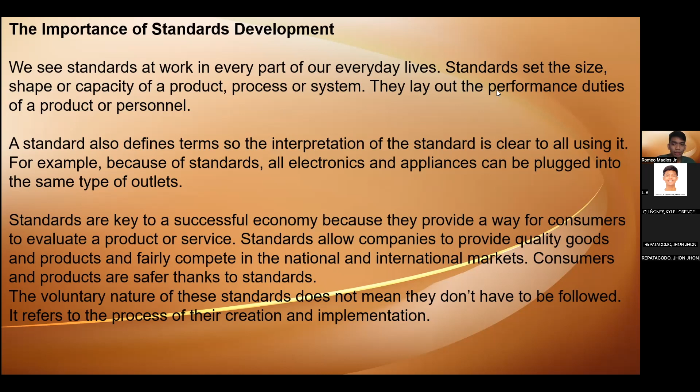Next slide, please. So American National Standards. This section solicits public comments on proposed draft new American National Standards, including the national adoption of ISO and IEC standards as American National Standards, and proposals to revise, reaffirm, or withdraw approval of existing American National Standards.

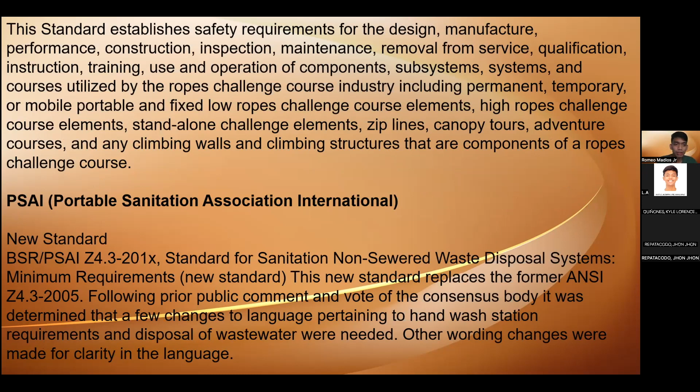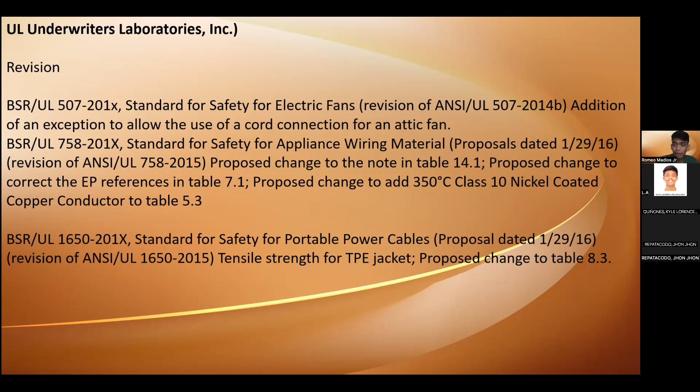Next slide. Underwriters Laboratories, Inc. - it is all allowed the use of cord connections for, dito sa nang-revise nila is all about wiring materials. Naka-focus sila sa isang cord connections for an attic fan. May mga standard na dapat gamitin dyan, kapag especially sa mga attic fan, may ginawa silang mga proper sizes or proper voltages na dapat. Madidiscuss yan sa next sa grupo ko for more information regarding dyan. Nakalagay dyan yung mga proposed change, yung mga temperature ng isang nickel coated copper. Nakalagay sa isang table dyan yung mga standard.

Next is Association for the Advancement of Medical Instrumentation. Dito naman, this is part of ISO 10993, nag-specifies requirements and gives guidance on procedures to be followed in the evaluation of the potential for medical device materials to cause adverse systemic reaction. Dito, nakafocus naman sila sa isang medical device materials na dapat may mga proper procedure dyan, yung mga guidance na dapat gawin kasi alam naman natin na sobrang sensitive ang mga medical device na dapat gagamitin. Dapat may mga proper guidance and procedure kung gagawin natin ito. Nakapaloob sa article na yun yung mga dapat gawin.

Next is ASABE or American Society of Agricultural and Biological Engineers. Ito is a new national adoption. It specified the type of information on safe working practices to be provided by manufacturers. Dito, nakapaloob sa isang article na to yung mga - ito yung specify the type of information on safe working.

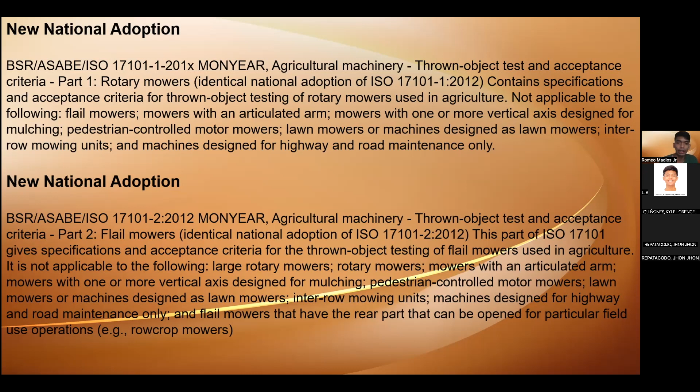Next is similar to that - verification. This is the safety standard for large row crop flail mowers, the new standard safety requirements and verification for design and construction of row-crop flail mowers with a cutting width larger than 3 meters, used exclusively for agricultural row crop applications which may have a rear part that can be opened for particular field operations. This method describes the elimination or reduction of hazards arising from intended use.

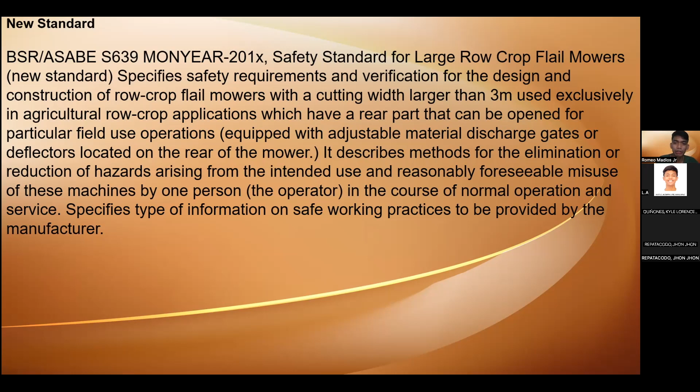Next is ASHRAE, the American Society of Heating, Refrigerating, and Air Conditioning Engineers. This is an addenda meant to eliminate scope overlap between 90.1 and 90.4. This addendum will not be published until 90.4 has been approved by the ASHRAE Board of Directors and there are no pending appeals. So this addenda is still pending.

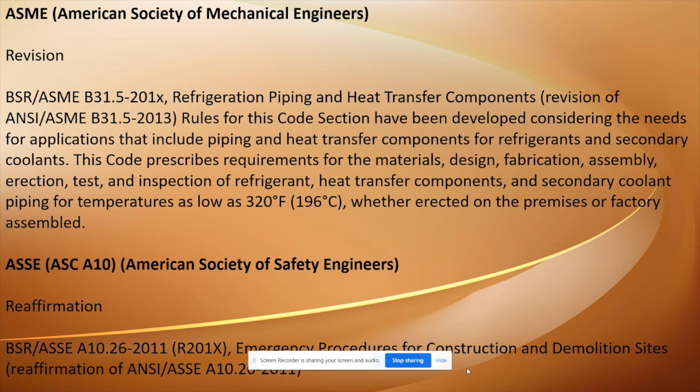This standard applies to those emergency procedures involving fire, collapse, hazardous spills, and other emergencies that could endanger workers, requiring emergency rescue of injured or ill workers, or of uninjured workers unable to rescue themselves. Next is on-site provisions of first aid and emergency medical care. Four is evacuation and transportation of injured or ill workers to appropriate emergency medical facilities. Five is the pre-planning and coordination of emergency plans with emergency medical facilities. Six is training on emergency procedures and plans for workers and other groups. This regulation is all about those emergency procedures.

So yung mga pre-planning during evacuation, before and after evacuation. Kapag may mga injured person, mga ill workers o yung mga injured workers, nakapaloob dito yung mga proper o mga standard o guideline na dapat gawin, mga dapat gawin, mga basic step.

Next is ASSE, American Society of Safety Engineers. This is all about safety requirements for climbing ladder fall arrest system, a new standard.

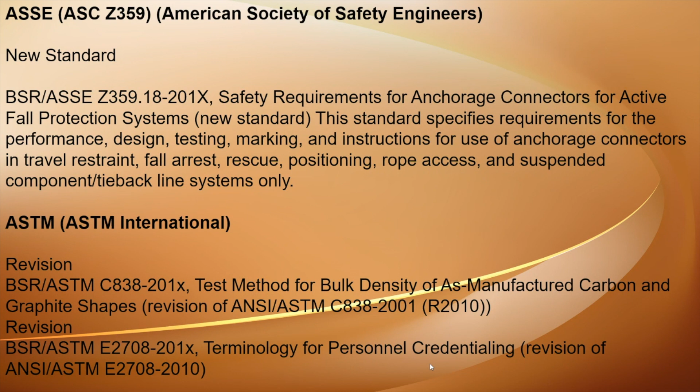Next is ECIA or Electronic Components Industry Association. New standard specification for small form factor, 88.9 mm, 3.5 inches drive new standard. This standard defines the dimensions and interconnections of the 88.9 millimeter or 3.5 inch small form factor disk drive. The purpose of this standard is to define the external characteristics of small form factor disk drives so that products from different vendors may be used in the same mounting configuration. The standard provides specifications on external dimensions, connector placement, mounting holes, and interface pinouts to assist manufacturers in the system integration of small form factor disk drives.

So this new standard, ginawa nila ito, ang purpose nito is para ma-define yung external characteristic ng disk drive, yung small form nito. So yun, nakapaloob dyan. Next is reaffirmation.

It is all about cable flexing test procedure for electrical connectors. These standards establish a method to determine the effectiveness of round jacketed cable relief shields or interface to withstand strain under repeated alternating cable flexing stress as experienced in use with molded or mechanical backshell. So cable strain relief designs commonly used with electrical connectors.

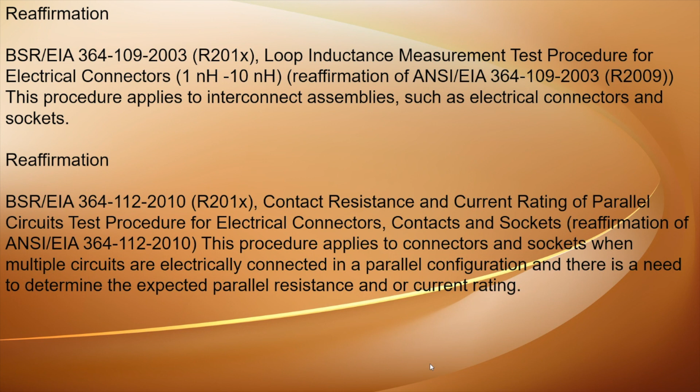Next is revision, environmental test methodology for verifying the current rating of freestanding power contacts for electrical connectors and sockets. This standard describes the recommended test sequences for verifying the specified current rating of freestanding contacts or electrical connectors and sockets used in power applications. This sequence may be used to qualify products with a specified current rating. Dito sa revision na to naka-focus sila sa mga recommended test sequence para sa pag-verify ng current rating of freestanding contacts, yung mga electrical connector or socket use na gamit sa isang power application. Nakapaloob lang 'to sa isang electrical connectors na nagamit sa isang power application, yung mga specified current rating.

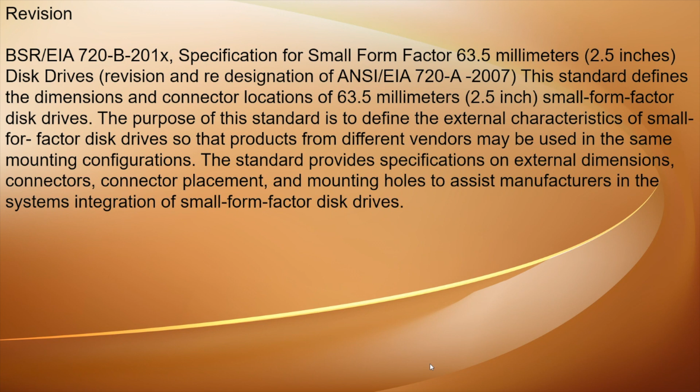Next one. IES, Illuminating Engineering Society of North America.

Lighting for hospitals and healthcare providers, reaffirmation of ANSI. This practice offers guidelines for good lighting in those areas unique to healthcare facilities and is intended for both lighting designers and healthcare professionals. Lighting needs are specific to acute care hospitals, chronic care hospitals, extended care facilities, and related facilities, freestanding ambulatory surgical centers, and emergency centers.

Dito, itong information na to is naka-focus sa good lighting especially sa mga healthcare facilities. Dito yung mga standard na gagamitin para sa mga magandang pailaw, para siyempre healthcare facilities, alam naman natin yan. Healthcare professionals, alam natin 24 hours yung ilaw na ginagamit. So syempre dapat alam natin yung standard na dapat.

Next is NEMA, National Electrical Manufacturers Association. It's all about magnet wire, revision ulit siya, and the redesignations of ANSI again with NEMA.

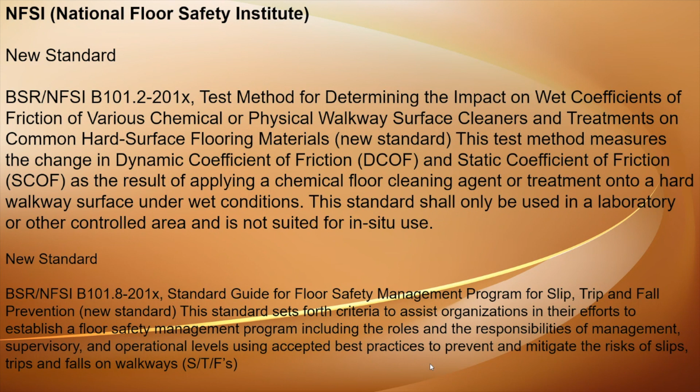So next is NSF, or NSF International. This is also a revised standard, for drinking water treatment units. The purpose of this standard is to establish minimum requirements for materials, design, construction, and performance of drinking water treatment systems that are designed to reduce emerging compounds in public or private water supplies, such as pharmaceuticals, personal care products, and endocrine disrupting compounds. Dito naman sa standard na ito, para makapag-establish ng minimum requirements ng material design ng isang drinking water treatment system na naka-design para ma-reduce yung emerging compounds, especially sa mga public or private water supplies tulad ng mga pharmaceuticals, personal care products, and endocrine disrupting compounds. Alam naman natin na sobrang sensitive ng area na iyan, kaya dapat pati yung tubig ay dapat nating ma-meet yung standard, ma-meet yung mga minimum requirements, especially sa mga design. Kasi once na pumalya na yan, malaking epekto, especially yun nga, may mga sensitive place na dapat, ultimo pati tubig dapat may standard.

Ganun. Next is Underwriters Laboratories Incorporated. Ito, marami itong parts, pero ito yung pinaka-main focus dito is yung Part 5 sa Standard for Safety for Explosive Atmospheres. So Part 5: Equipment Protection by Powder Filling. Proposed date: January 29, 2016.

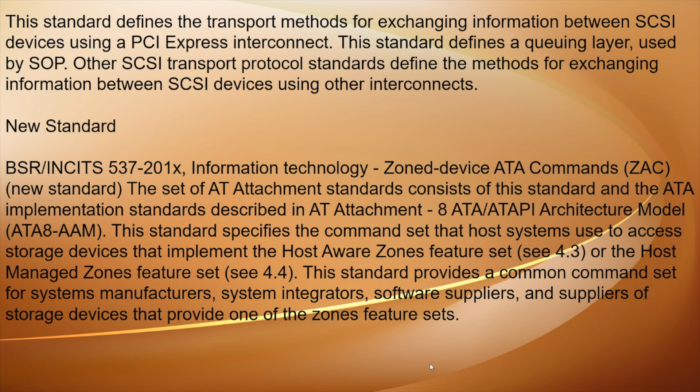Next is Underwriter Laboratories Incorporation. New national adoption, part 1 only covers general requirements. These are identical national adoptions of IEC 60730-1 and revision of ANSI UL 60730-1, 2013 edition adopting the 5th edition of IEC. This article covers part 1, the general requirements, especially the identical national general requirement standards. If you want more information, the next group will discuss more about part 1.

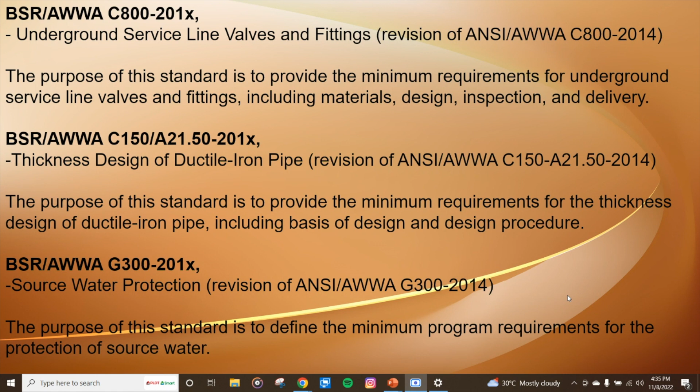Next is BSR or AWWA G430-201X, Security Practices for Operation and Management. The purpose of this standard is to define the minimum requirements for a protective security program for a water, wastewater, or reuse utility that will promote the protection of employee safety, public health, public safety, and public confidence. This standard covers the minimum requirements for a protective security program for a water, wastewater, or reuse utility.

Next is BSR or AWWA G481-201X, Reclaimed Water Program Operation and Management. The purpose of this standard is to define the critical requirements for the effective operation and management of a reclaimed water program. This standard describes the critical requirements for the effective operation and management of a required reclaimed water program. Reclaimed water for the purposes of this standard is treated domestic wastewater that is at all times adequately and reliably treated to the level appropriate for the end user.

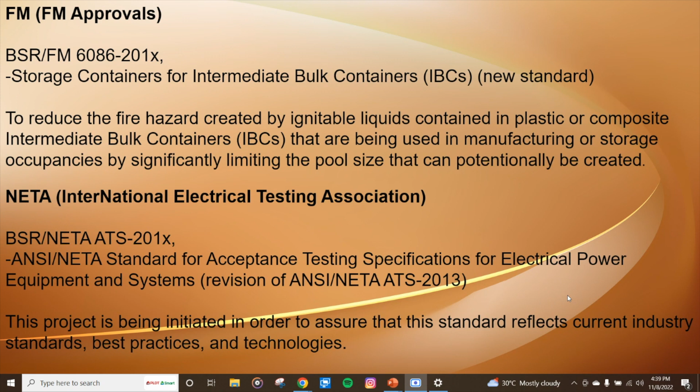American national standards maintained under continuous maintenance. The ANSI essential requirements, due process requirements for American national standards, provide two options for the maintenance of American national standards: periodic maintenance and continuous maintenance. These are the ANSI accredited standards developers that have formally registered standards under the continuous maintenance option.

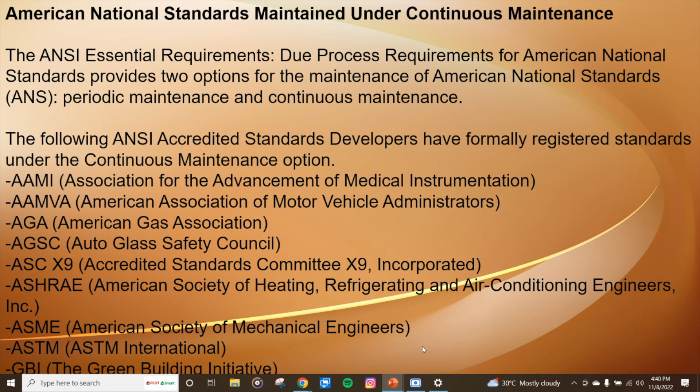AAMI, or Association for the Advancement of Medical Instrumentation. AAMVA, or American Association of Motor Vehicle Administrators. AGA for American Gas Association. AGSC for Auto Glass Safety Council. ASC X9, Accredited Standards Committee X9 Incorporated. ASHRAE, or American Society of Heating, Refrigerating, and Air Conditioning Engineers. ASME, or American Society of Mechanical Engineers. ASTM, or ASTM International. GBI, or the Green Building Initiative.

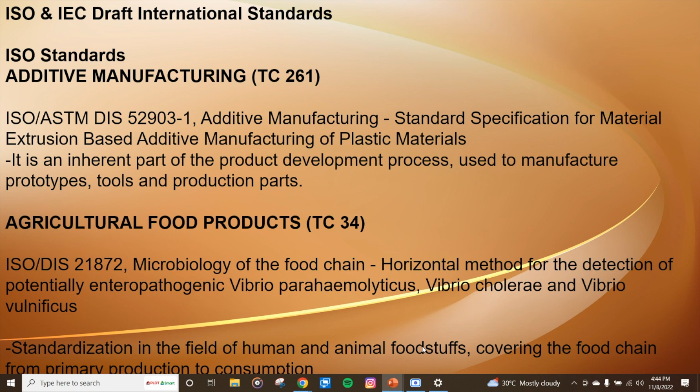Air quality: stationary source emissions, determination of the biogenic fraction in CO2 in stack gas using the balance method. This covers measurement planning procedures for quality assurance or quality control (QA/QC), and methods for the evaluation of results including determination of uncertainty, excluding the establishment of limit values for air pollutants, air quality in clean rooms, and radioactive substances. Next then is aircraft and space vehicles.

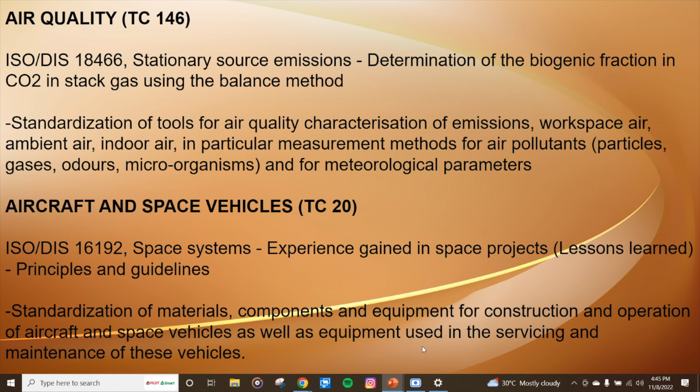Space systems, experience gained in space projects, principles and guidelines. This covers standardization of materials, components, and equipment for construction and operation of aircraft and space vehicles, as well as equipment used in the servicing and maintenance of these vehicles.

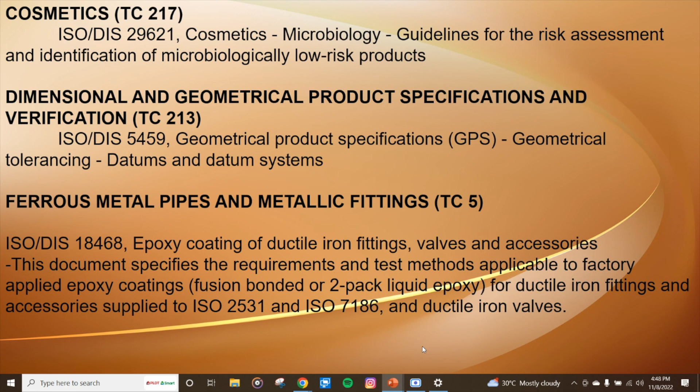Gas cylinders stamp marking. This includes steel and aluminum gas cylinders, composite gas cylinders, acetylene cylinders, liquefied petroleum gas or LPG cylinders, and small cylinders.

Next is gas cylinders, 17E and 25E taper threads for connection of valves to gas cylinders. This specifies the dimensions and tolerances for taper screw threads of nominal diameter 17.4 millimeter used for the connection of valves to gas cylinders.

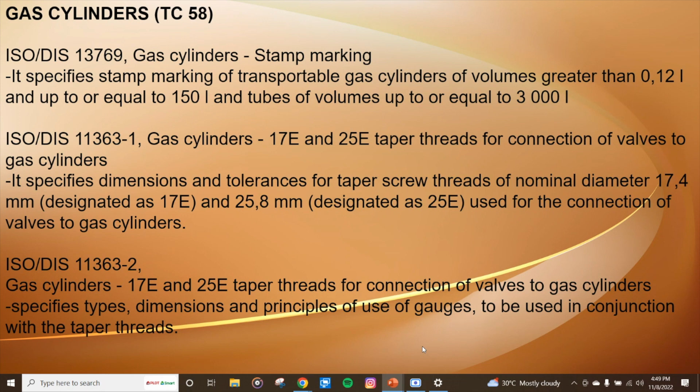Graphic technology. Graphic technology process control for the production of half-tone color separations, proofs, and production prints. This specifies the requirements for systems used to produce hard copy digital proof prints intended to simulate a printing condition defined by a set of characterization data.

Next is industrial trucks. Industrial trucks, lorry-mounted trucks, Part 1, safety requirements and verifications. This deals with all significant hazards, hazardous situations, or hazardous events relevant to machinery when it is used as intended and under conditions of misuse which are reasonably foreseeable by the manufacturer.

Next is internal combustion engines. Methods of test of full flow lubricating oil filters for internal combustion engines. This is limited to steady state conditions and does not address fluctuations in the flow rate. The test procedure determines the contaminant capacity of a filter, its particulate removal characteristics, and differential pressure. This test is intended for application to filter elements with an efficiency of less than 99% at particle size greater than 10 microns.

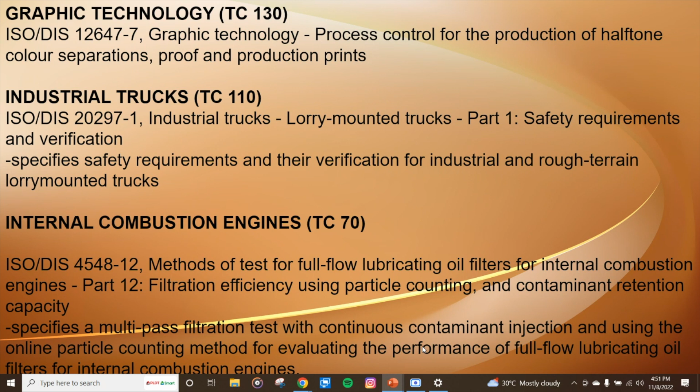Next is machine tools. Environmental evaluation of machine tools, Part 2, methods for measuring energy supplied to machine tools and machine tool components. This provides methods to quantify the energy supplied to components in order to assign their share to generalized machine tool functions.

Next is nickel and nickel alloys. Nickel and nickel alloys forgings. This specifies requirements for nickel and nickel alloy forgings for general purposes.

Next is personal safety, protective clothing and equipment. Protective clothing for firefighters, physiological impact, Part 1, measurement of coupled heat and mass transfer with the sweating torso. This standard's test method characterizes the essential properties of fabric assemblies of a representative garment or clothing assembly for thermophysiological assessment, and is intended to be used to measure and describe the behavior of fabric assemblies of a garment or clothing assembly in response to a simulated series of activities under controlled laboratory conditions.

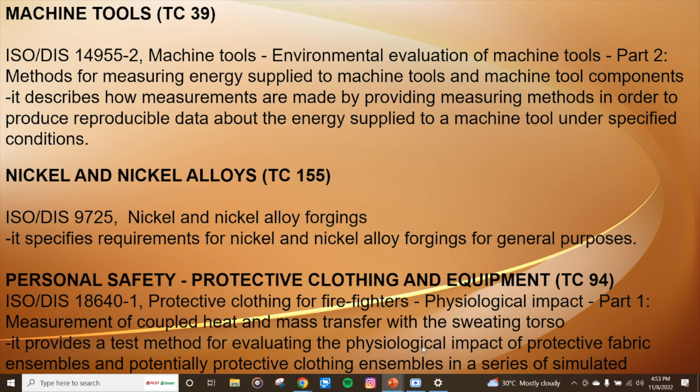Next, protective clothing for firefighters, Part 2. The result of this test can be used as the elements of a risk assessment with respect to thermophysiological load.

Next is plastics. Plastics, vertical flame spread determination for film and sheet. This specifies a test method for measurement of flame spread properties of vertically oriented specimens of plastics in the form of film and sheet, 3 millimeters or less in thickness, subjected to a small igniting flame.

Next is project committee, energy management, activities relating to energy services, guidelines for the assessment and improvement of the service to the users. This provides best practice guidelines for energy service providers in order to continually improve their practices and quality interaction with users.

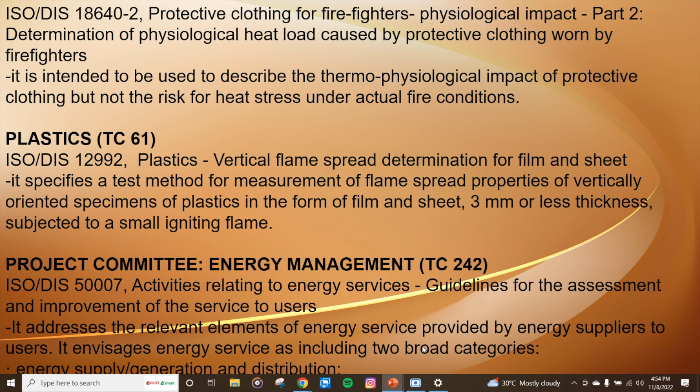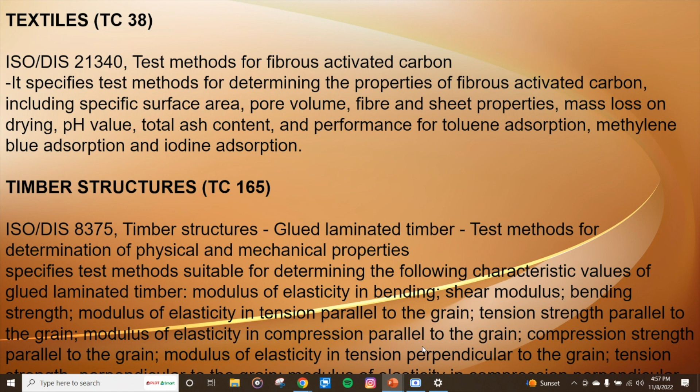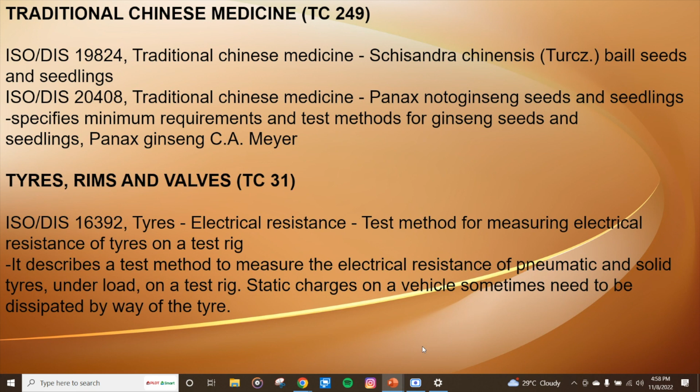Next is tires, rims, and valves. Electrical resistance, test methods for measuring electrical resistance of tire on a test rig. Electrical resistance inversely measures the ability of the tire to dissipate static charge from the vehicle.

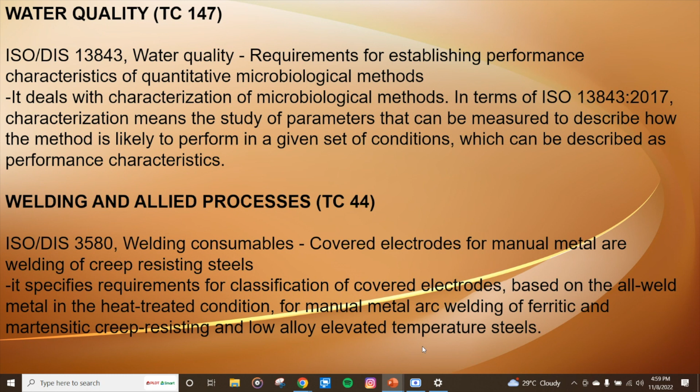Next is welding consumables. This is a combined standard providing for classification utilizing a system based upon nominal composition or utilizing a system based upon alloy type.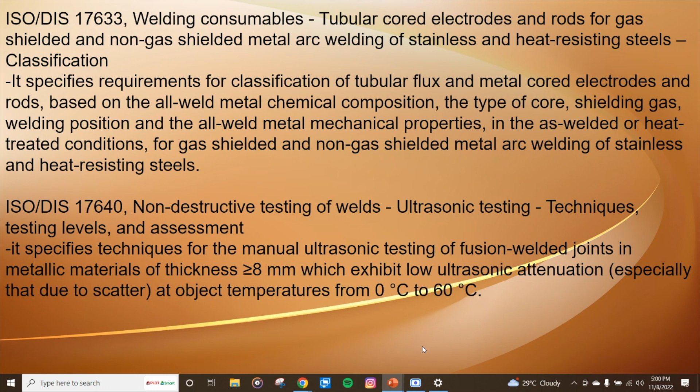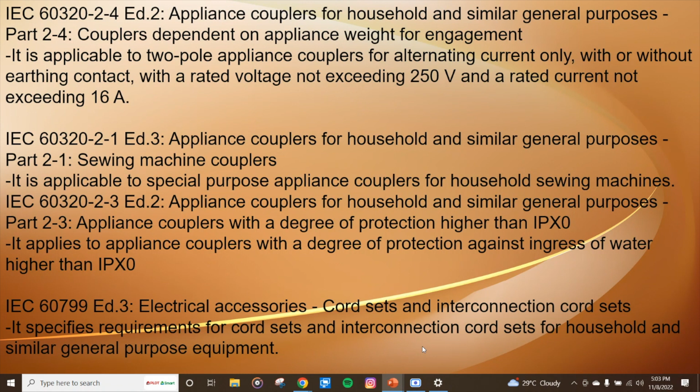Next is quantities and units, Part 5, thermodynamics. This gives names, symbols, and definitions and units for quantities of thermodynamics, where appropriate conversion factors are also given.

Next is electroacoustics, hearing aids, method for measuring electroacoustic performance up to 16 kilohertz. This technical specification describes coupler measurement methods to characterize the electroacoustic performance of hearing aids and insert earphones, primarily in the range of 8 kHz to 16 kHz.

Next is amendment 1, lamp control gear, Part 2-11, particular requirements for miscellaneous electronic circuits used in luminaires. It specifies general safety requirements for miscellaneous electronic circuits used with luminaires for use on AC supplies up to 1000 volts at 50 Hz or 60 Hz and/or DC supplies up to 250 volts.

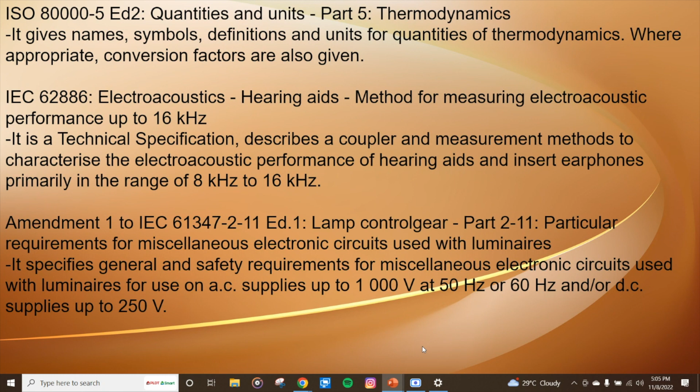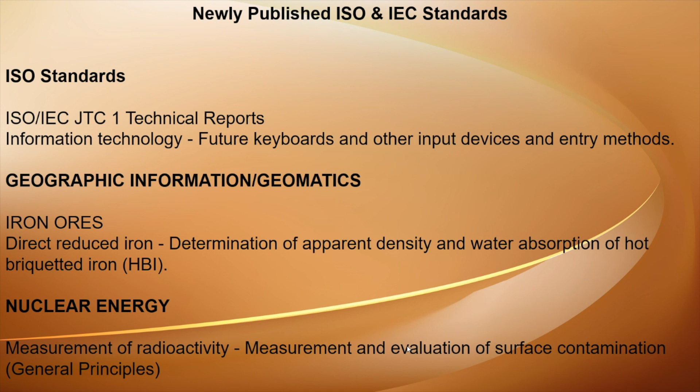Next, measurement of radioactivity. This one is the test method using wipe test samples. So it means like taking samples of the radioactivity.

Next is the apparatus calibration. This next one is like calibrating it.

Next one is paper, board, and pulps. Paper and boards, testing of cores. This means determination of characteristics of conser- concentric rotation.

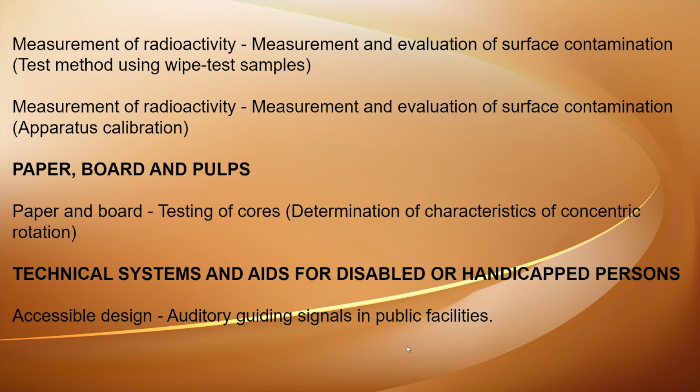Next is technical systems and aids for disabled or handicapped persons. Accessible design means auditory guiding signals in public facilities, like guiding signals placed in public facilities.

Next is transport information and control systems. Under this is electronic fee collection, the application interface definition for autonomous systems, which is charging, like having a fee or charge. Next is the communication and connection to the lower layers.

And next is the application interface definition of autonomous systems, which is context data, pneumatic tubes for automotive vehicles, and technical requirements and test methods.

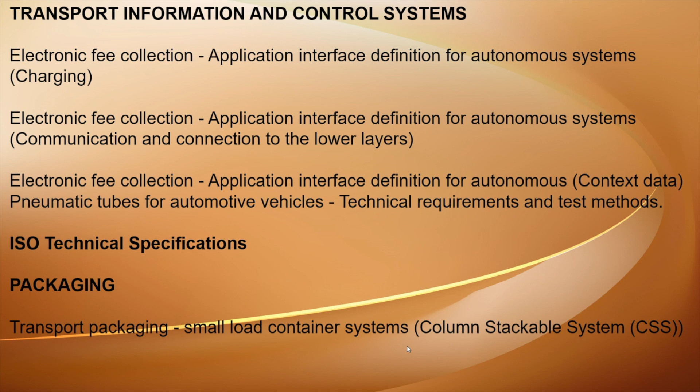Next is ISO technical specification, under which is packaging, transport packaging, small load container system, or the column stackable system. Next, petroleum products and lubricants.

Under that is petroleum products, which is biodiesel: determination of free and total glycerin and mono, di, and triacylglycerols by gas chromatography. Next is determination of the total esters content by gas chromatography.

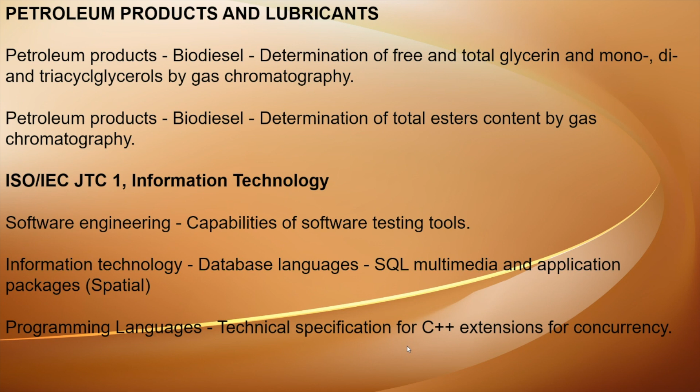Next is ISO, the ISO IEC JTC1 Information Technology, which is under software engineering: the capabilities of software testing tools. Next is information technology, meaning database languages and SQL, multimedia, and application packages, spatial. Next is programming languages, meaning the technical specification of the C++ extension for concurrency.

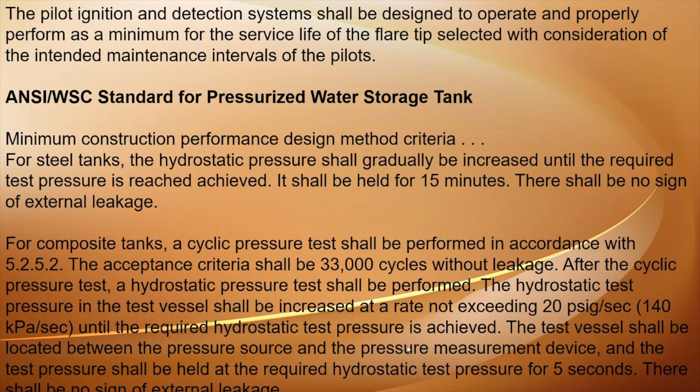For composite tanks, a cyclic pressure test shall be performed in accordance with 5.2.5.2. The acceptance criteria shall be 33,000 cycles without leakage. After the cyclic pressure test, a hydrostatic pressure test shall be performed. The hydrostatic test pressure in the test vessel shall be increased at a rate not exceeding 20 psig per second, until the required hydrostatic test pressure is achieved. The test vessel shall be located between the pressure source and the pressure measurement device, and the test pressure shall be held at the required hydrostatic test pressure for 5 seconds. There shall be no sign of external leakage.

Proposed revision to ANSI PRCA 1.0-3-2014, Ropes Challenge Course Installation, Operation and Training Standards. An error has been noted in the June 10, 2011 public review changes. The purpose of this proposal is to correct the public review error to reflect the standards committee vote on the standard clause. This ANSI public review is for review and comment upon the proposal listed herein only. Note to reviewers: this proposal makes a change to the current standard.

The proposed revision is indicated in legislative format. Strike-through indicates the deletion of a word, phrase, or material. Underline indicates insertion of new wording, phrase, or material. Only the affected portion of the existing ANS is shown herein. Any non-legislative format material is provided for context only and is not open for comment.

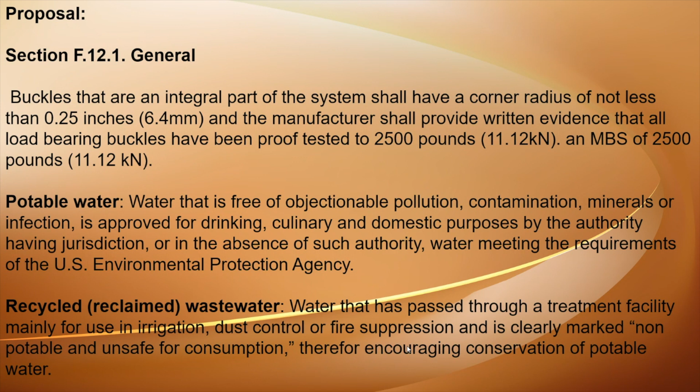Next is sanitary condition. Within the meaning of this standard, that physical condition of working quarters which will tend to prevent the incidence and spread of disease. Sanitize: to make free from dirt, infection, disease, etc. by cleaning it to make something sanitary. Next is tertiary standards: a final stage of water treatment before it can be discharged back into the environment.

Next is toilet facility: a series of fixtures maintained within a room for the purpose of defecation, urination, or maintaining personal hygiene. Next is the urinal: a fixture maintained within a toilet facility for the sole purpose of urination.

Next is a water closet: a toilet or fixture which is designed to receive human waste directly from the user and discharge it to the drainage system.

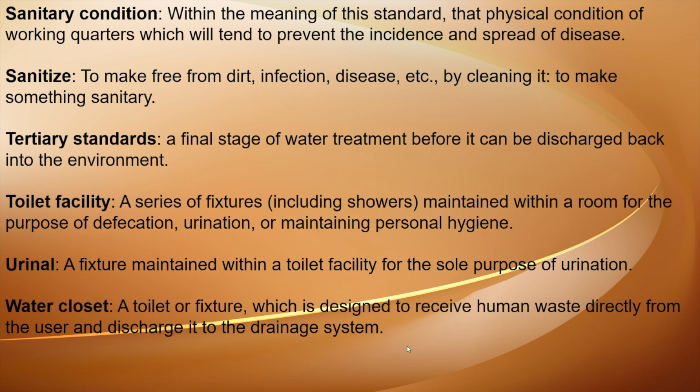Next is Mr. Mutuc for the next report. The last part is mine, Aldwyn Lyre.

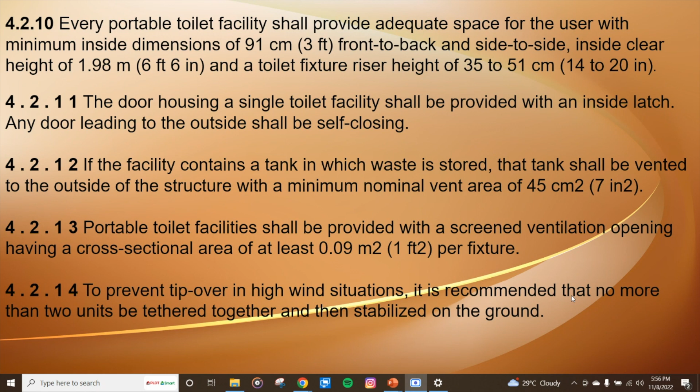Next slide. 4.2.15, deodorizers, when used, shall be in accordance with applicable federal, state, and local provisions at each time of service. At each time of service, the waste container shall be completely drained and sanitized, then recharged with water and deodorizer before use. Kung gagamitin ang deodorizer, dapat may conformity sa federal, state and local provisions. Itong mga deodorizer na to, madalas parang patch, nilalagay sa mga waste container to lessen the odor. Bago maglagay ng deodorizer, dapat completely dry and sanitize na yung paglalagyan.

Next, 4.2.16, hand washing facilities in accordance with GAP best practices shall be placed adjacent to and on the outside of portable restroom units, for efficiency after employees' break and for visual assurance that proper hygiene is being followed. Locating hand wash facilities within portable restroom units is also an accepted practice, as long as proper hand washing techniques are discussed with all employees and documented, and signage stating the requirement that employees must wash hands prior to returning to work is posted in an obvious location inside the unit. Hand wash facilities shall be equipped with a foot pump or hands-free system to deter the exchange of communicable disease, and to be equipped with their own gray water tank to prevent overfilling or accidental spillage of black water in the portable restroom tank when transported to different locations on site.

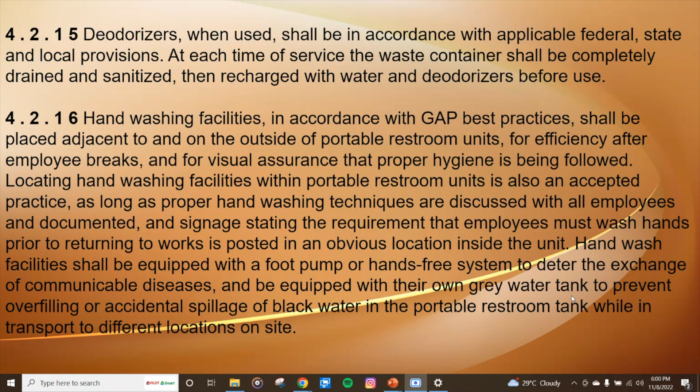Next slide. 4.2.17, hand washing facilities shall be maintained in clean and sanitary condition and follow all guidelines set forth in ANSI Z4.3-20XX for sanitation, non-sewered waste disposal systems, minimum requirements section 6.3. Hand wash station requirements: they must be properly stocked with unscented soap and single-use paper towels at all times. Ito naman, parang katulad ng sinabi sa 4.2.16, na bukod sa dapat i-maintain na dry and clean ang hand wash facility, dapat meron din disposal system sa mga hand washing facilities, na matatalakay natin mamaya sa section 6.3.

So next, 4.2.18, a sanitary receptacle shall be built in or near the hand washing facility for disposal of used paper towels. If not built in, the receptacle shall have a tight fitting cover.

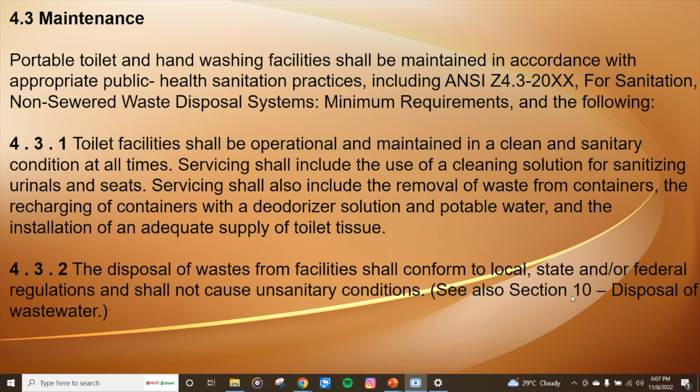Self-explanatory naman na sinasabi lang na yung pag-dispose ng waste sa mga facility ay dapat mag-comply sa mga rules and standards ng isang lugar at hindi ito mag-cause ng unsanitary conditions. Next po.

Next, 4.4, reasonable use. Employees shall be allowed reasonable opportunities during the workday to use the facility, taking into account the ambient temperature and humidity, as well as the health, age, and physical condition of the individual employee.

4.4.1, it is the responsibility of the agricultural employer to advise all employees on the importance of good hygiene, which in turn should minimize the amount of exposure in the field from either excessive heat, communicable diseases, and individual health issues.

Dito naman, promote ng employer or company na magkaroon ng good hygiene yung mga employees to lessen or to prevent the health issues. Lalo na ngayon, pandemic, may mga ibang companies din na nagkakaroon ng seminars o nagpo-provide sila ng seminars about the importance of having a good hygiene.

Next, 4.4.2, good hygiene practices should be explained as follows: to use the facilities for elimination as often as physically necessary to prevent personal health infections, to drink water frequently especially on hot days, wash hands before and after using toilet facilities, and to wash hands before eating and or smoking.

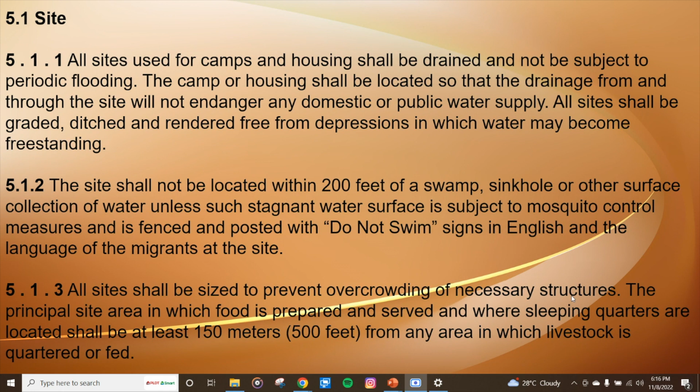Next, 6.2.3 deodorizers - similar to what was discussed earlier, so we'll skip that. Next, 6.2.4: Flushing shall be accomplished by controls operable without special knowledge and are clearly identifiable. The unit must have a vigorous flow to carry waste into the container.

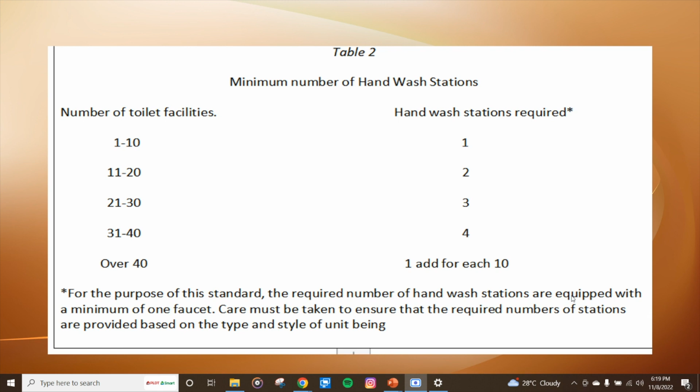6.3.2 Materials that are in contact with grey water shall be non-absorbent and corrosion resistant. Nasabi na natin kanina kung ano yung grey water, so self-explanatory na lang din na dapat non-absorbent and corrosion resistant yung material na gagamitin sa passage ng grey water. Kasi yung grey water, hindi siya kasing linis ng potable water, kaya mas mabilis ma-trigger yung mga materials na pwedeng mag-cause ng pangangalawang at paglulumot, at pwede rin siyang bumaho.

Next, 6.3.3, potable water and wastewater passage shall have smooth surface and shall be free of obstructions, recesses, or chambers that would allow fouling or algae buildup to occur. Dito naman dapat patag o smooth yung passage ng tubig para maiwasan ang pagbuo ng lumot doon sa dadaanan ng potable water o wastewater. Example dito, sa mga drainage natin, madalas hindi sila gaano smooth at may mga part na nagsistay yung tubig, kaya nagkakaroon ng paglulumot at mataas din ang chance na mabara o lumubog.

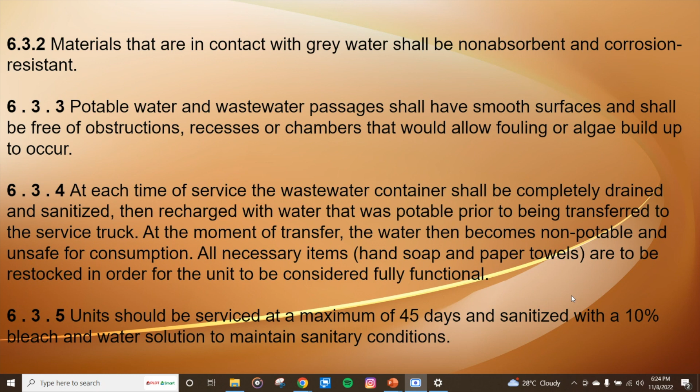Next, 6.3.5, units should be serviced at a maximum of 45 days and sanitized with a 10% bleach and water solution to maintain sanitary conditions. Self-explanatory naman sa pagbasa pa rin natin, alam na natin.

So, 6.4, trailer facility requirements. 6.4.1, types of manufactured portable sanitation trailers can range from enclosing portable restroom, decontamination units, locker compartments, shower facilities, or combination units and laundry equipment. Sinasabi lang dito yung mga type ng sanitary trailer facilities, which is yung portable restroom, decontamination unit, locker compartment, shower facilities, or combination units and laundry equipment.

6.4.2. Unless otherwise designated, all trailer systems must be in accordance with the Title 24 Code of Federal Regulations, Part 3280 for mobile manufactured home construction standards, including Part 3280.607 - plumbing fixtures, in addition to all applicable federal and state local provisions. Yung mga nasa batas lang yung nandito, o yung sinasabi na dapat may mga standard na sinusundan ka, yung standard ng plumbing fixture na applicable at tanggap sa given places kung saan nilalagay yung trailer facility.

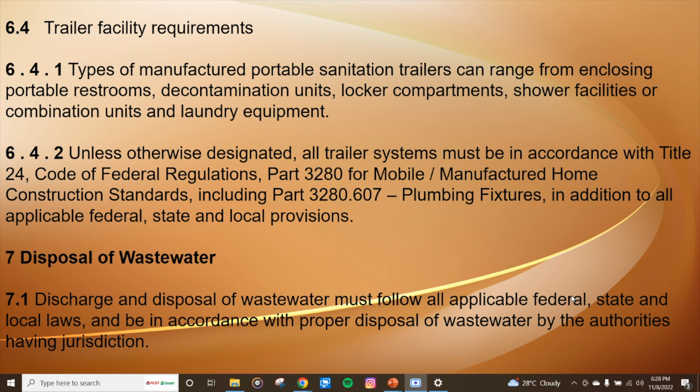Next, 7.2, adherence to the policy set forth by the local authorized wastewater treatment facility will be observed in terms of proper policy and procedures for discharge and disposal of wastewater. Sinasabi na sa pag-dispose ng wastewater, sinisicheck ng mga local facilities kung tama ba yung procedure ng pag-dispose o pag-discharge mo.

Next, 7.3, both the company and the employee operating within the industry must meet any and all federal, state, and local municipality standards, licensing, and permits in order to haul and dispose of liquid waste. Ito self-explanatory na lang din na dapat lahat ay sumunod at ma-meet yung mga standard ng federal, state, or local municipality sa liquid waste. Next.

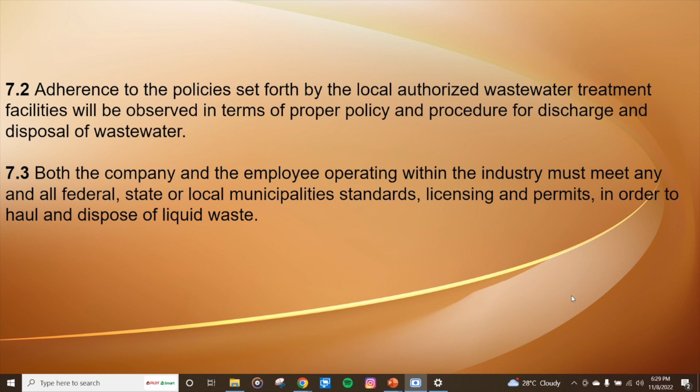1,500 amperes. For example, permitted supply short circuit current is 500 amperes, and optionally, the permitted prospective short circuit current of the external electrical supply the equipment is designed for a short circuit current of 1,500 or more. For example, permitted supply short circuit current 2,500 amperes.

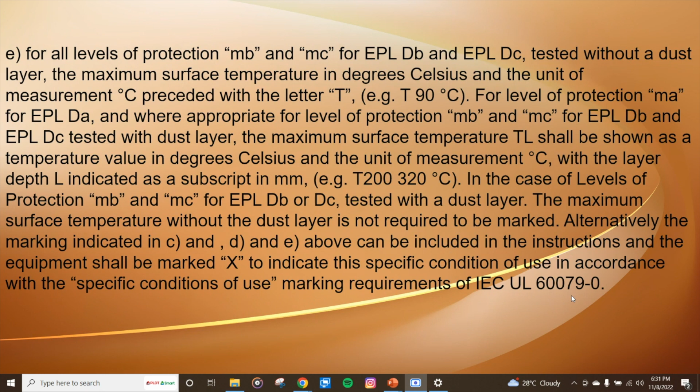9, in addition, BSR UL 507, Standard for Safety for Electric Fans. 9, addition of an exception to allow the use of a cord connection for an attic fan.

13.1.2, with reference to the requirements specified in 13.1.1, the following types of appliances shall be provided with means of permanent electrical connection to the power supply. A, attic fan, an appliance intended for permanent attachment to a building structure.

C, duct connected appliance. Yung duct connected appliance, ito yung mga vents na nakikita natin sa mga mall or sa mga supermarket, yung sa parang ceiling, may mga passage vents. Tapos, D, range hood. Yung range hood naman, ito naman yung makikita madalas sa mga kitchen vents.

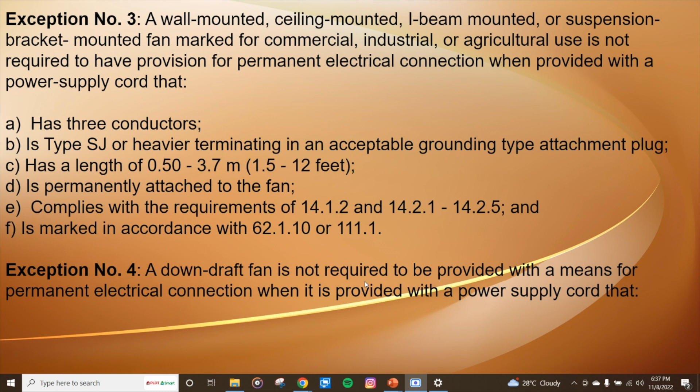Okay, so, in next, means for permanent electrical connection when it is provided with a power supply cord that has at least 457.2 millimeters or 18 inches, but not more than 762 millimeters or 30 inches long. B has three conductors, one being the equipment grounding conductor. C is type S, SJ, SJO, SJT, SJTO, SO, ST, or STO. D is permanently attached to the fan at a location intended to be below the surface of the cooking area. And E complies with the requirements of 14.1.2 and 14.2.1 to 14.2.5.

Exception number 5, range hood. Ito yung example ng range hood.